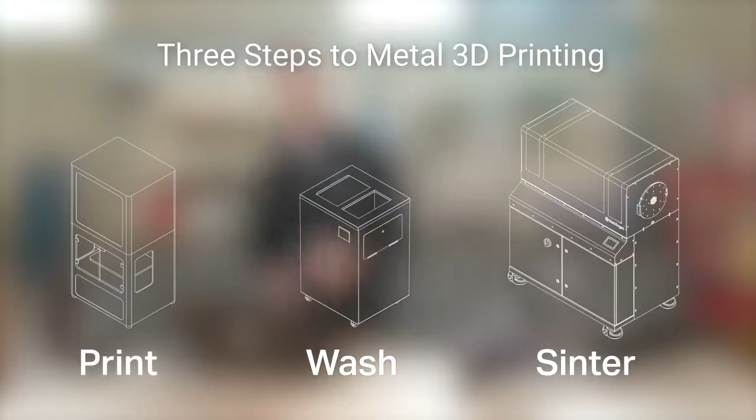First, let's start with CAD. You design your part, then export to STL and upload into Eiger. Eiger is a cloud-based slicing and print management system that comes with every Markforged product. This automatically configures your part based on the material and printer you've selected.

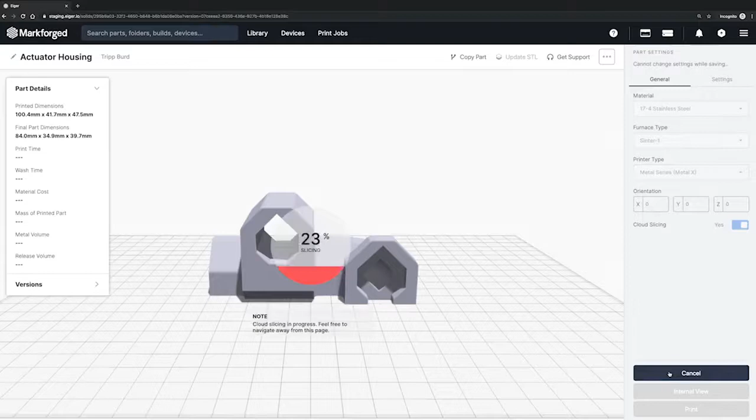When your part slices for metal 3D printing, it gets scaled up to account for shrink and deformation in the downstream processes. It then slices your part into discrete layers, identifies overhang features, and builds supports and a raft underneath your part. As we go through printing, washing, and sintering, Eiger will monitor the part's progress along the way. Let's start this print and go to the Metal X.

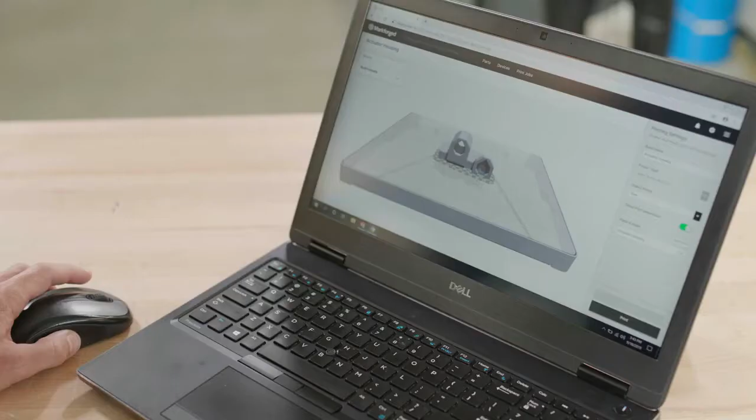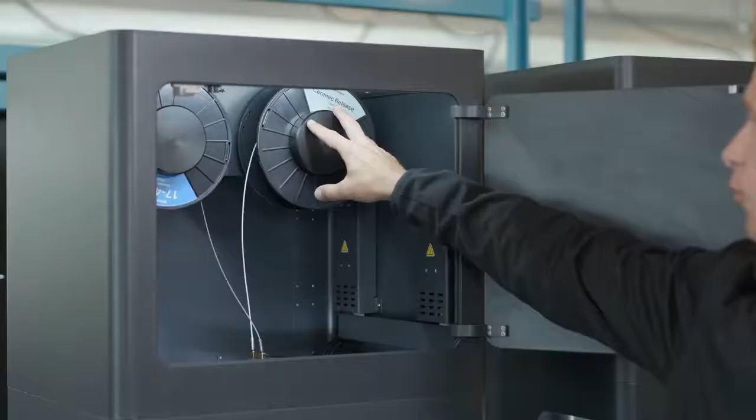Before starting a print, the machine automatically maps and levels the bed to ensure the first layer goes down well. Your print is built of 2 materials stored in this heated chamber above. One of ceramic release material and one of the metal to be printed. This filament material is metal powder safely suspended within a 2-part plastic binder. It gets heated and extruded onto the build plate where the part is created layer by layer.

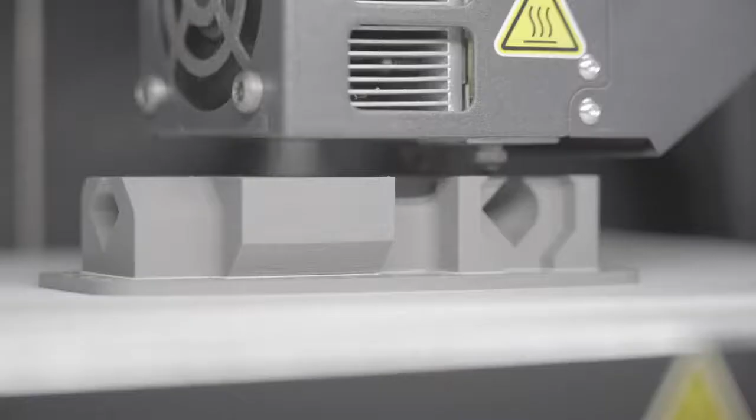The release material gets extruded as an interface between the part and its supports, so that once your part comes out of the furnace, it's easy to remove. Unlike other metal 3D printing systems, this process does not require loose metal powder, resulting in a safer and more cost-efficient workflow. 17-4 stainless steel is loaded now. However, with a quick changeover, the system is capable of printing in stainless steels, tool steels, coppers, Inconel, along with several other materials currently in development.

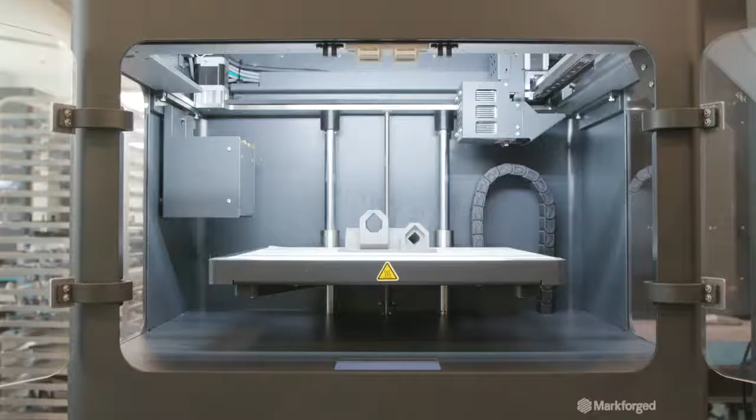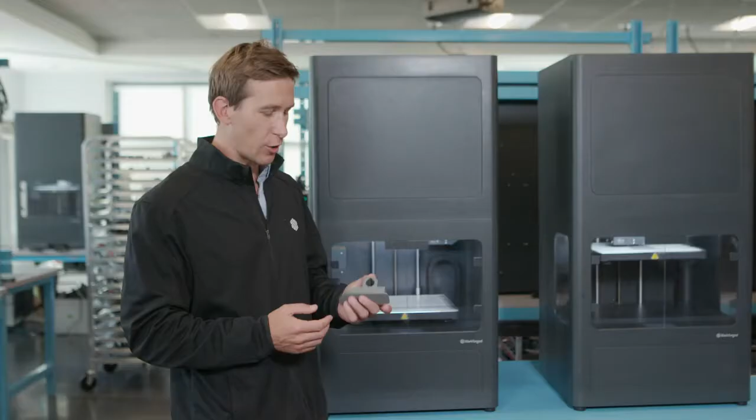Once your part is finished printing, you'll get a notification. At this point, you can go to the printer, remove the part from the build tray, and clear the bed. Now we have what's called a green part. It doesn't really look or feel like metal. However, a large part of it is comprised of metal powder. Next step will be putting it into Wash-1 for the debind process.

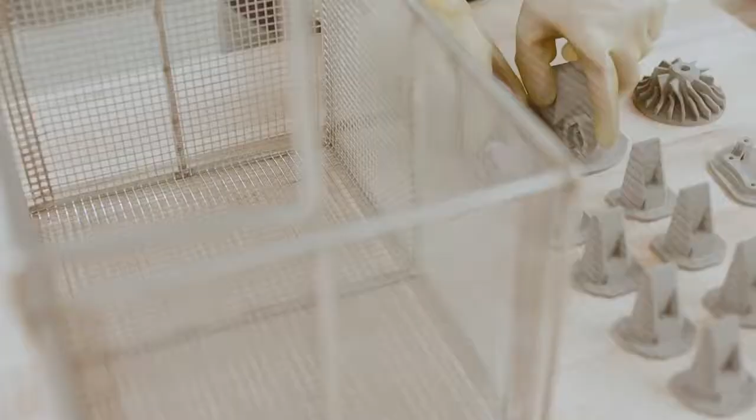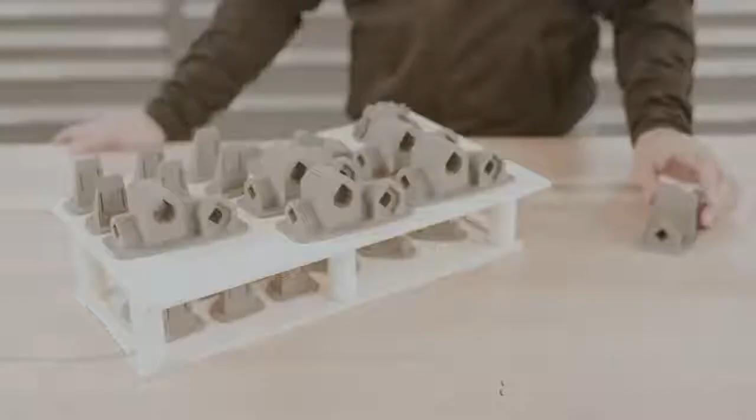The Wash-1 removes the first stage of the binding material. A green part is taken from the printer and placed into the wash basket, which is then lowered into the solvent. Wash times will vary, ranging from a few hours to a few days, depending on the thickest region of your part. After that, it's now called a brown part and is ready for sintering. Let's go over to the furnaces.

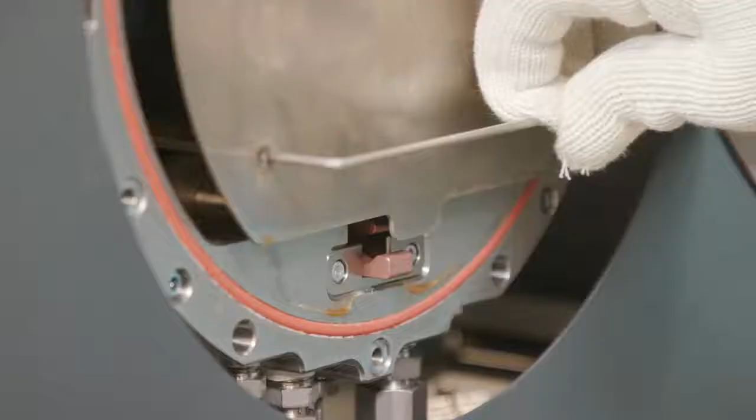This is Sinter-2, a furnace designed for mid-volume production runs and larger printed parts. Sintering transforms a print from a lightly bound collection of metal powder to a fully finished metal part. First, the temperature ramps slowly to burn away the trace amounts of remaining binding material. Then, temperature ramps closer to the melting point of the material, allowing metal particles to start to fuse together to create a strong metal part.

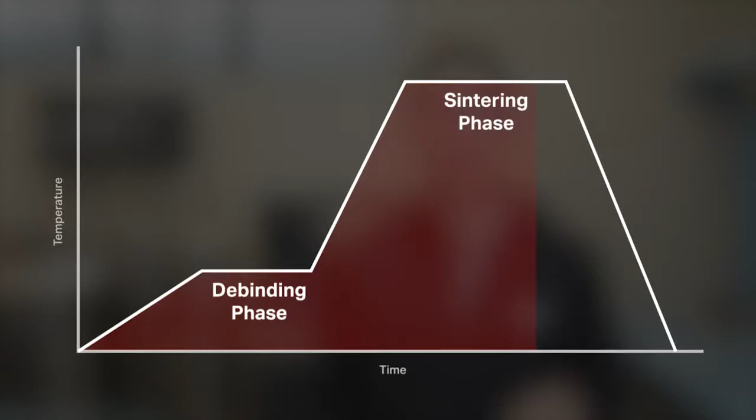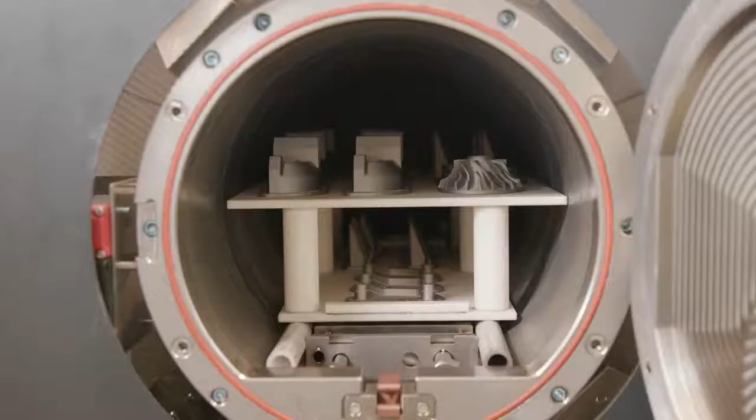Markforged sintering furnaces use a carbon-free retort to ensure part quality and alloy composition standards are met for our finished pieces. Each run takes about a day and can be monitored remotely using the Eiger software. Once a run is complete, the setter tray full of finished metal pieces can be removed from the furnace. Once removed from the raft, these parts are ready for use.

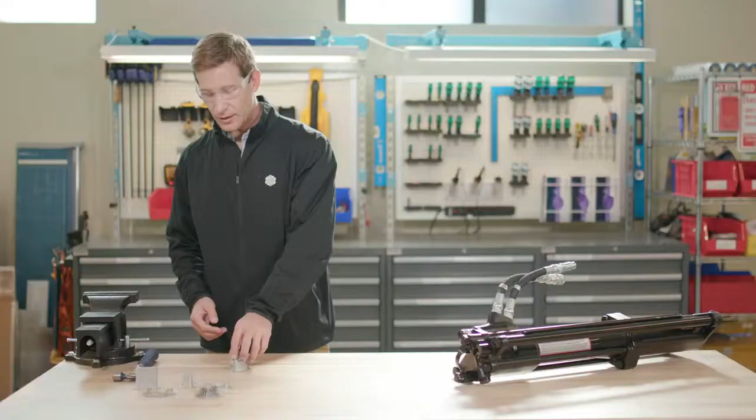In the furnace, the layer of printed release material between supports and the raft and your printed part remains powderized. This allows the structure to be tacked to the raft to better control shrink and accuracy throughout the process, but also an easy release after sintering.

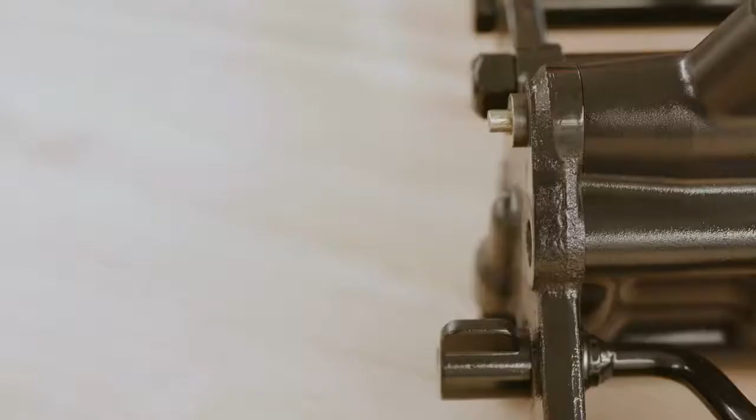At this stage, your part is fully sintered and ready to be used. It can be post-machined, polished, or otherwise processed as necessary for the final application, but in many uses, the accuracy and strength are good enough as is. It's ready for install.